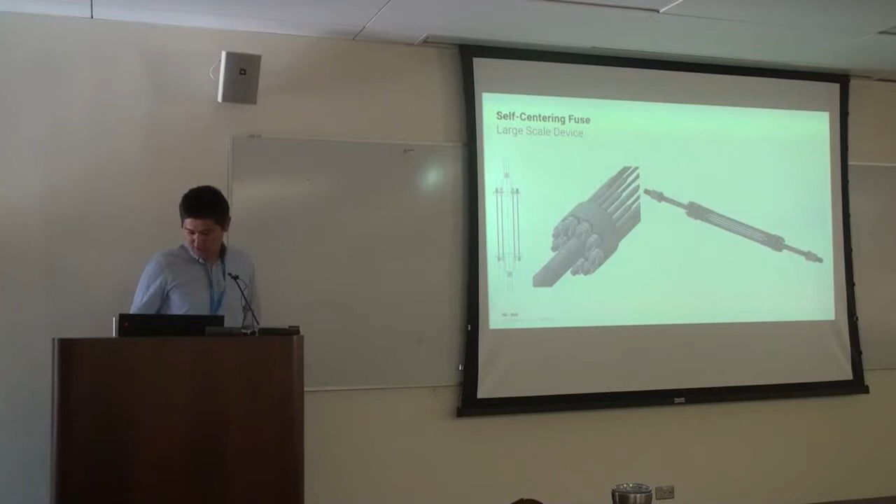So here's what we would look at maybe on a larger scale device, similar to what we would put into the Bechtel project. And a little more detail here. And working with TriPyramid, who does a lot of the architecturally exposed bracing, to bring in a level of refinement to it. And as you can see here on the right end, an embedded turnbuckle so that the system can be pre-tensioned without a big obtrusive turnbuckle on the end.

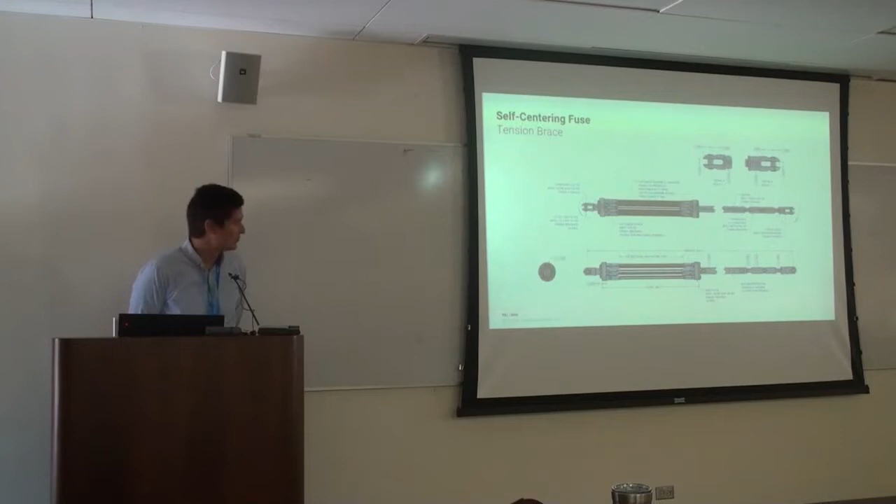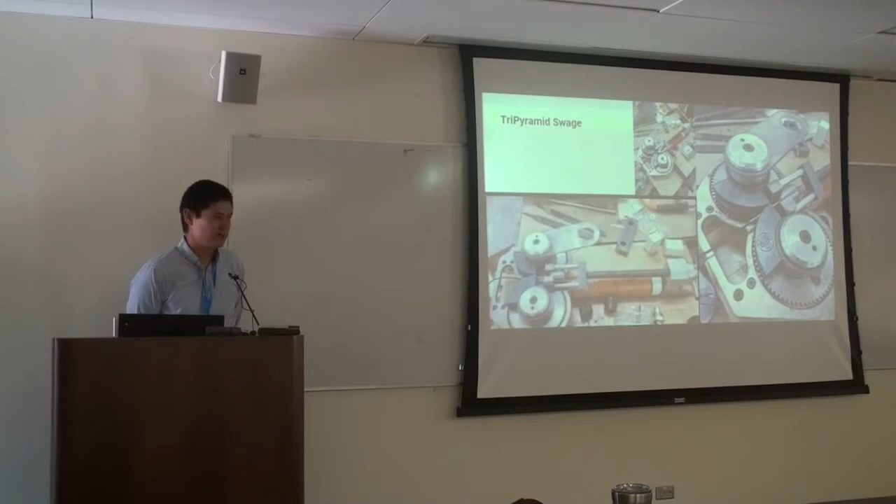And then the other main challenge we're working on is how to take all these smaller cables and provide a reliable anchor at the end that's also very minimal and small in profile. So we're working again with TriPyramid on the swaging of these cables that transitions it to just a threaded end with just a nut at the end. And here's just a prototype in their lab right now, what that looks like with the silver swage, and then you can see the nuts at the end.

On the analysis side, we're also learning a lot. One of the challenges, modeling in SAP or ETABS, is there's not a way to model this flag-shaped hysteretic behavior. Luckily, there was a paper in the ASCE Journal of Structural Engineering from a couple years ago that we were able to build off of, and a lot of our engineers who are here have been working on this, but essentially each SMA device in our nonlinear model is made up of 5 link elements,

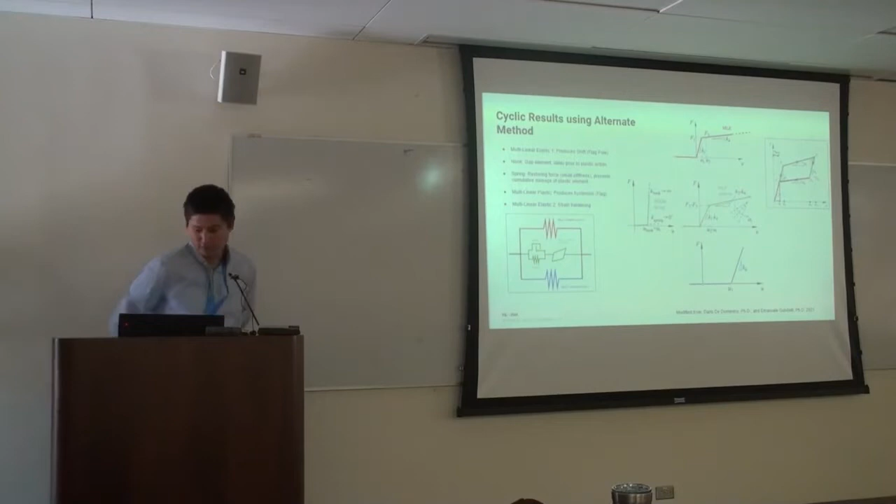multiple multilinear elastic elements, hooks and springs, and then a plastic element. And then when putting those all together, some in series, some in parallel, you can actually recreate the behavior that we're looking for very well. So here's our earlier test based on some early physical test results. We were able to match very closely by tuning these 5 links.

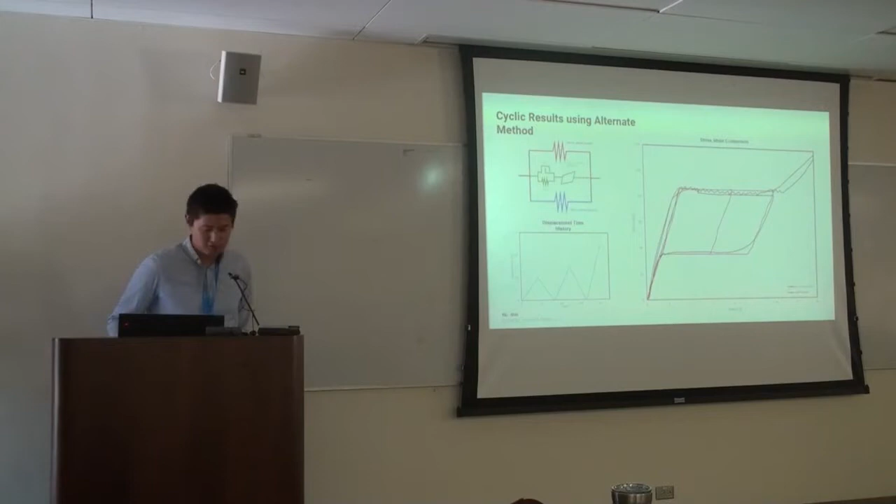And then here's where we are now. The gray in the back is our most recent cyclic test of these cables. And you can see a slope that's formed by the angle of the assembly of this cable. And then the black, or the dark, is our current analysis matching that.

So a couple more things just to note, and they'll become important to the goals of this test. Rupa's mentioning the point of hardening, which for this sample is around 5.5% strain. So our current design is to stay below that, and so that's that red line there. And so our tests that we're doing here are all targeting right around there, maybe a little below or a little over. And then in terms of an overstrength design, by staying below the hardening, and then with the appropriate overstrength, all attachments and components would be designed for that blue line there.

So Rupa's now going to talk a little bit more about the specifics of the tests.

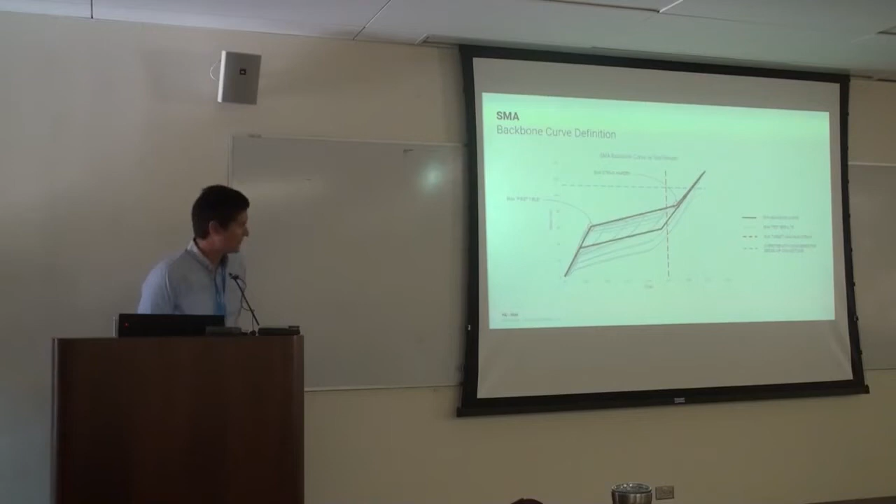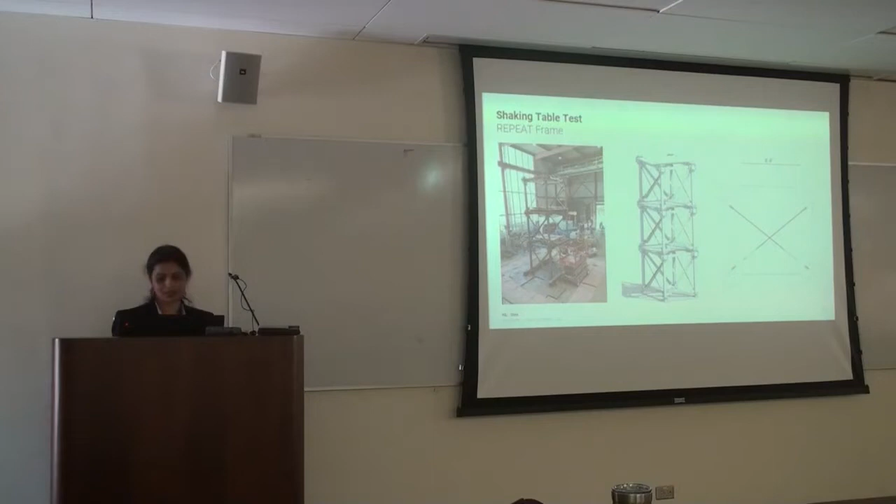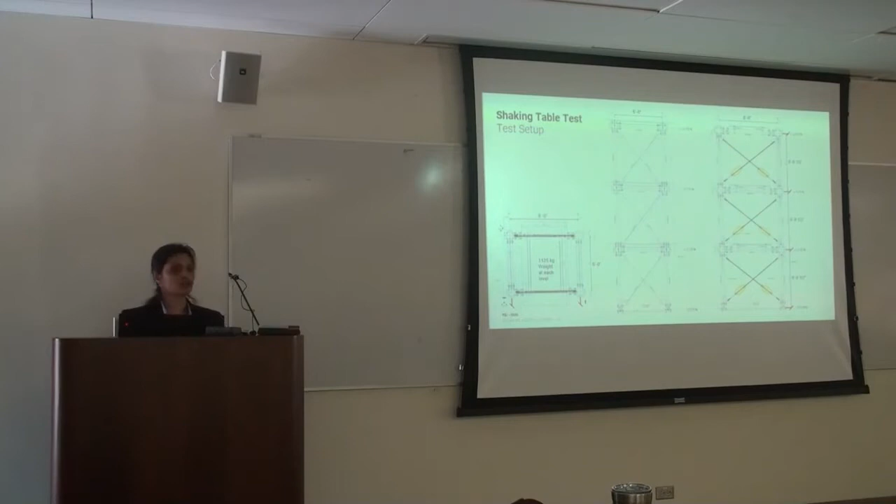And this frame is basically a 3-story frame that we have here at the lab, which you'll be seeing in a few minutes. It's an 8-foot bay. It's a north frame and a south frame. In the other direction, we are not applying the ground motion, so that is a regular concentric braced frame system with angles.

And because we are going to be doing this scale test, each device has only 3 cables, and we put in 3 cables because that amount of material was the only material that we had readily available, and we could put this into 12 devices. And TriPyramid engineered this elegant solution where the anchor, the nut ends, are completely concealed in the end devices.

And yesterday when we were doing our sine wave test, white noise test, and we also ran one ground motion, we actually completely dismantled this particular device and figured out how to do it. So if we can do it, definitely anybody can do it. I mean, I was there, so I could do it. Anybody could do it. So we feel pretty comfortable. Very elegant solution here.

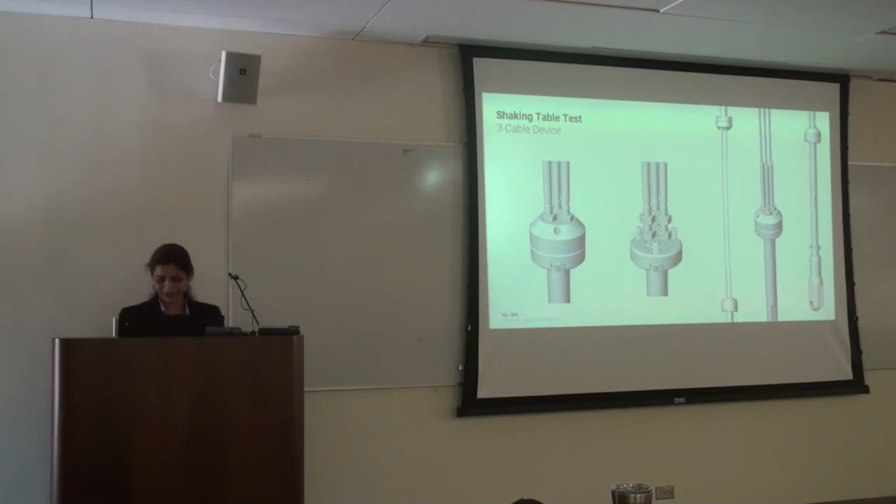And this was how these devices were shipped into the lab, and they contained these wooden rods. And the mechanism was such that these cables were pre-strained and then brought into the lab. We attach the rod to it, put in the clevises, and when we tighten the clevises to a certain point, and the rod is in a bit of tension, the wooden rods pop off. So it's a nice way of just making that happen.

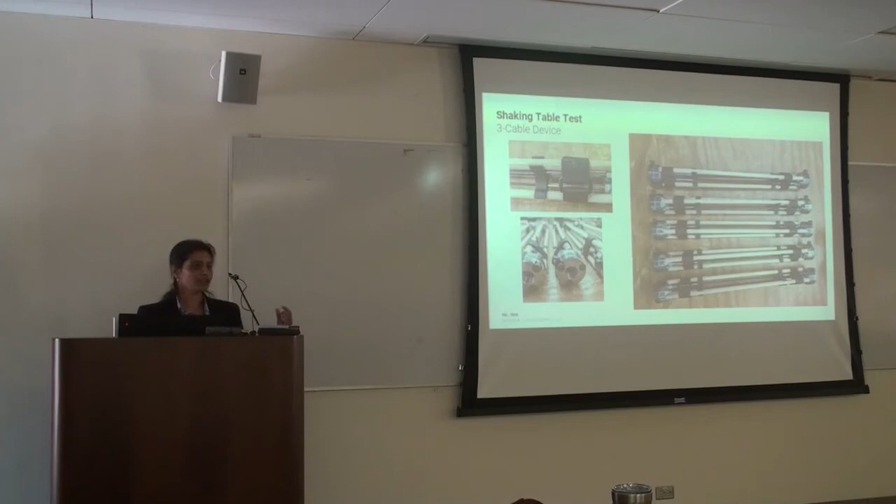But in the lab, we also had the strain gauges to measure that and make sure that indeed in the cables we have the pre-strain that we were asking them to put on.

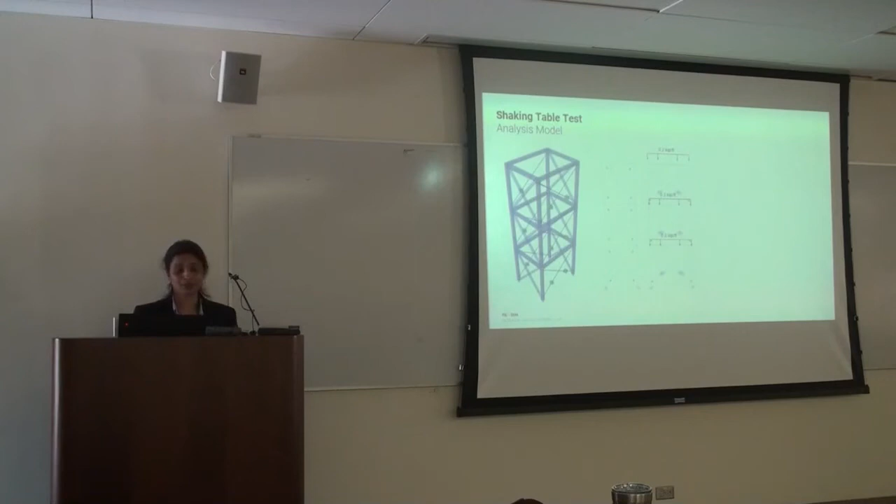So here is our shake table test analysis model that Yang has been furiously working on, measuring the period of the structure and trying to input it and rerunning the analysis with different ground motions. And we looked into 10 different ground motions. We ran one of them yesterday, the Loma Prieta one.

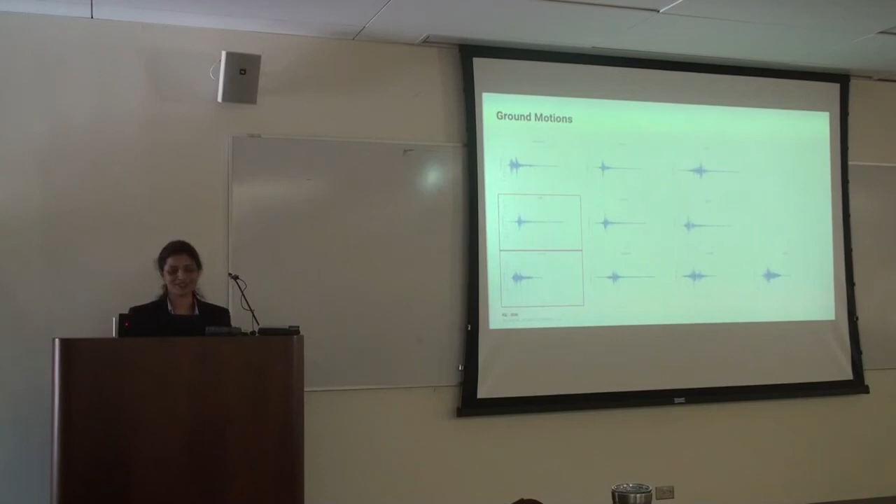These are the 10 ground motions that we are studying at the moment, and either today, tomorrow, or next week, we are going to run most of them. Today, we think we are going to run the Kobe as well as the Kocaeli. You're very familiar with those ground motions if you are in this engineering field.

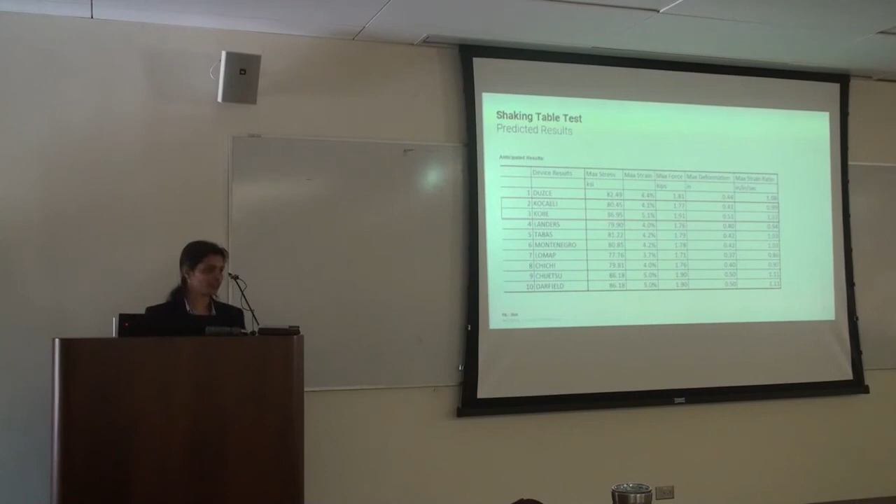We expect that the amount of strain that we see in these devices is going to be in the order of 5.5%, because the frame turned out to be a little softer than what we had anticipated it to be. And we can clearly relate to the fact that when we model in ETABS or any analysis model as a completely fixed connection, nothing is completely fixed. It has some flexibility to it.

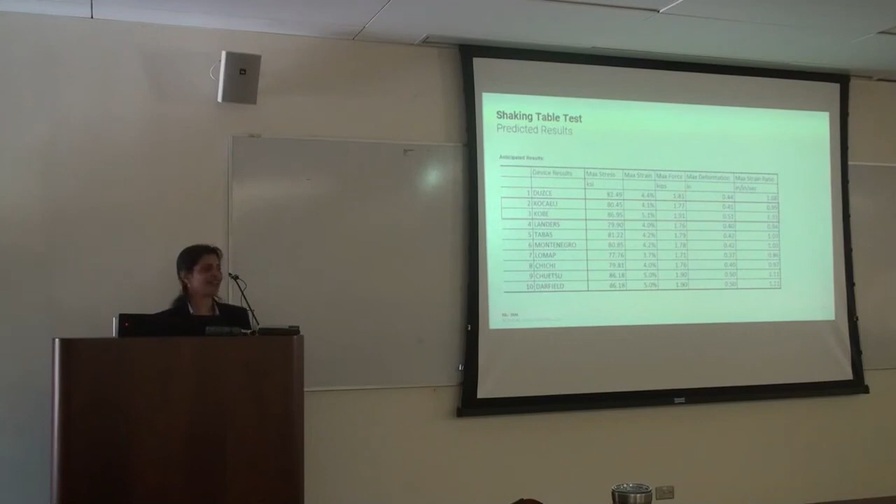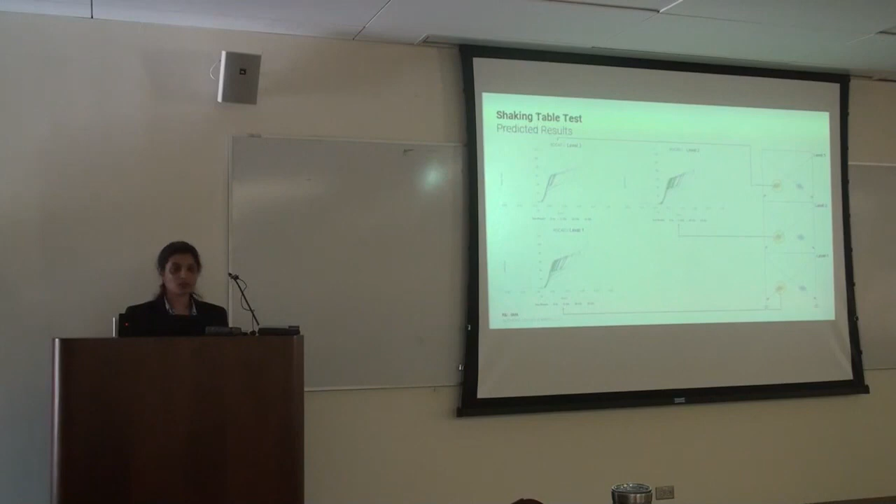Nevertheless, we expect the behavior to be such that each of the devices will follow the hysteresis that we are looking for here. We would perhaps see a drift in the range of 4.5%. We'll check on that today. And with that, we will have Michael conclude for us.

Thank you. I just want to recognize many of the people who've been involved in this, and actually many are in the room here, so thank you very much for that. And our collaboration partners, but particularly PEER, who's made this possible.

One of the really wonderful things about today is it gives me and our team a little perspective on how far we've come in 50 years. And we realize that we are just part of a continuum that's happening, and perhaps we can add our little bit of research to the mountain that Professor Mosalam has described, and carry on. So thank you very much.